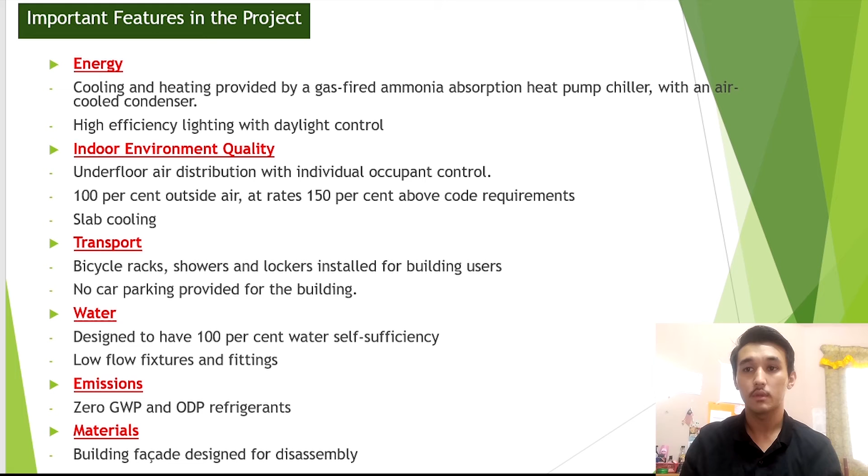Now explaining about the ventilation of this building: it has windows that are rotatable 180 degrees, which allows more ventilation to be transmitted through the building.

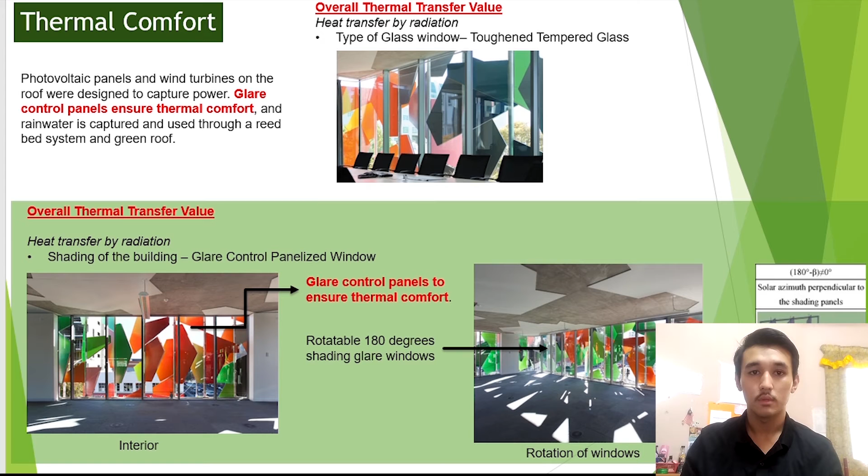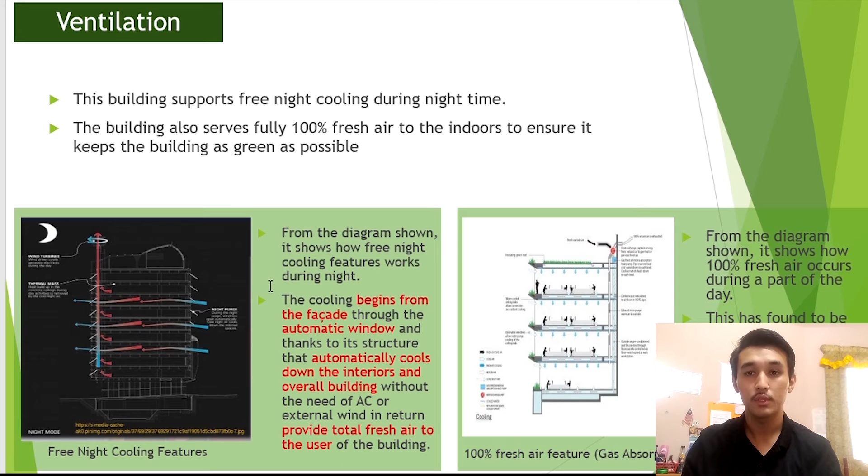This ventilation also serves 100% fresh air to the indoors to keep the building as green as possible. This building relies more on natural ventilation, which minimizes the usage of AC and fans.

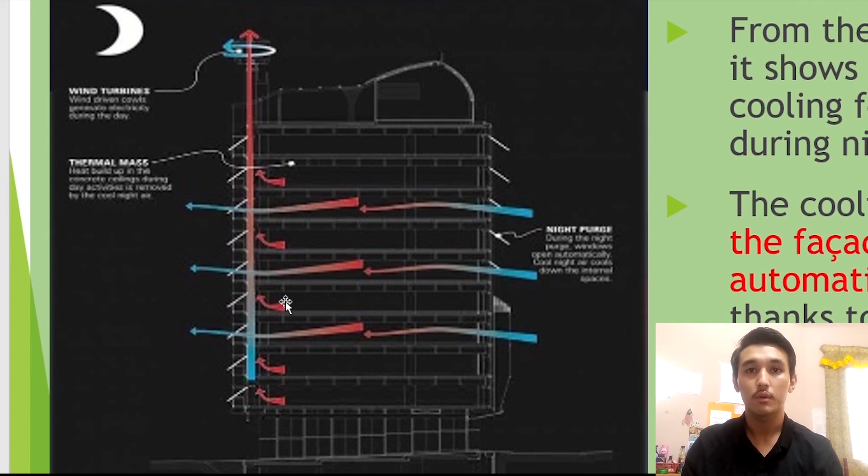As shown in the diagram during the night, this illustrates how the free night cooling feature works, along with the daylight glare control feature built into the building. Thanks to the effectiveness of the built-in glare control, it fully provides sunlight shades to the interior and reduces overall heat.

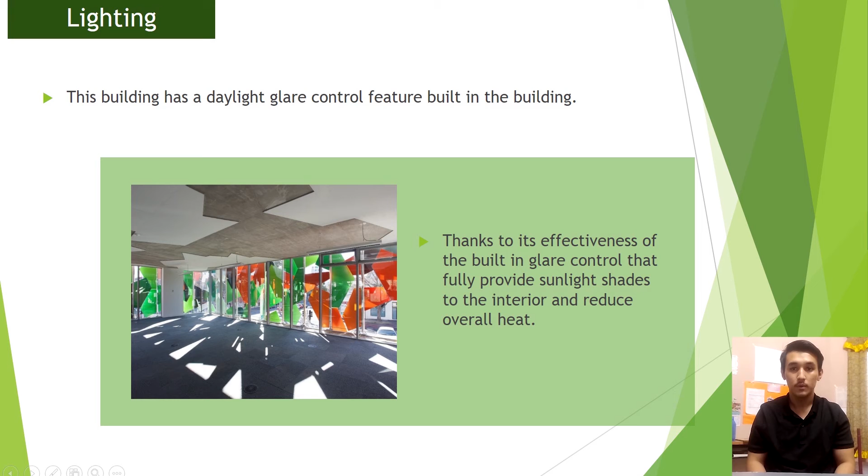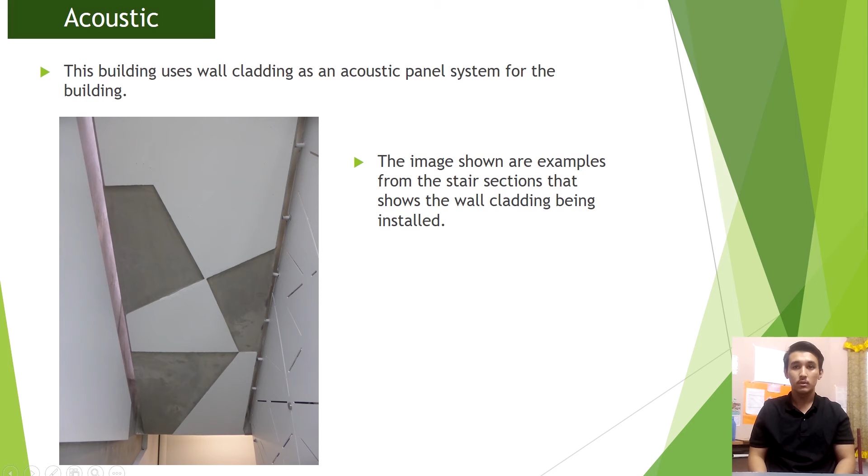For acoustics, this building uses wall cladding as an acoustic panel system. The image shown is an example from the stair section showing the wall cladding being installed.

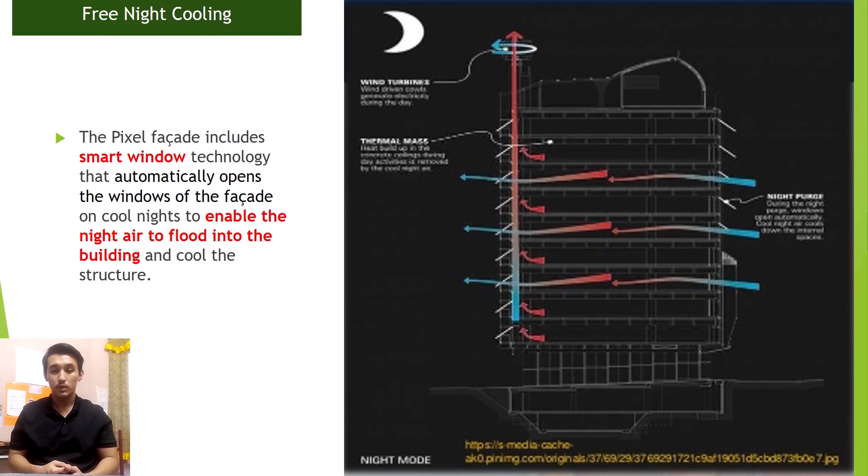Now about the free night cooling: the Pixel facade includes smart window technology that automatically opens the windows on cool nights to enable night air to flood into the building and cool the structure, as mentioned in previous slides.

This building also has a 100% fresh air feature. All of the air being distributed and used in the Pixel building is 100% fresh air.

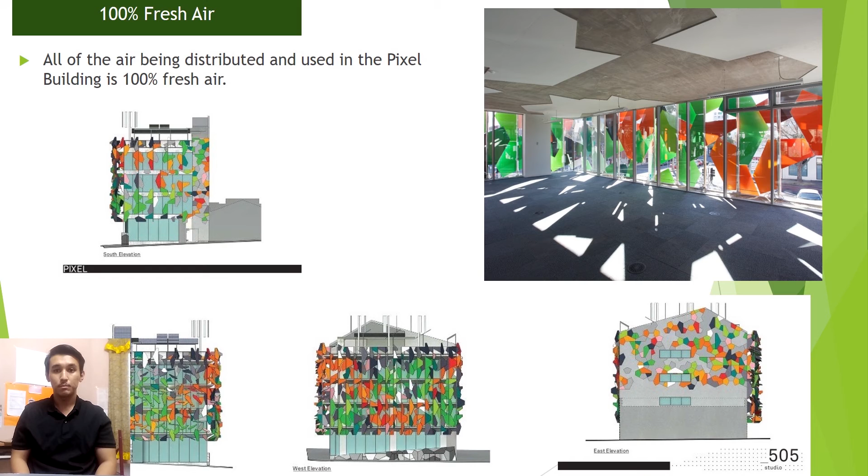Now to the gas-fired absorption chiller. This is the first of its kind in a commercial building in Australia, and as a consequence of this technology, the carbon emissions from the energy are dramatically lowered.

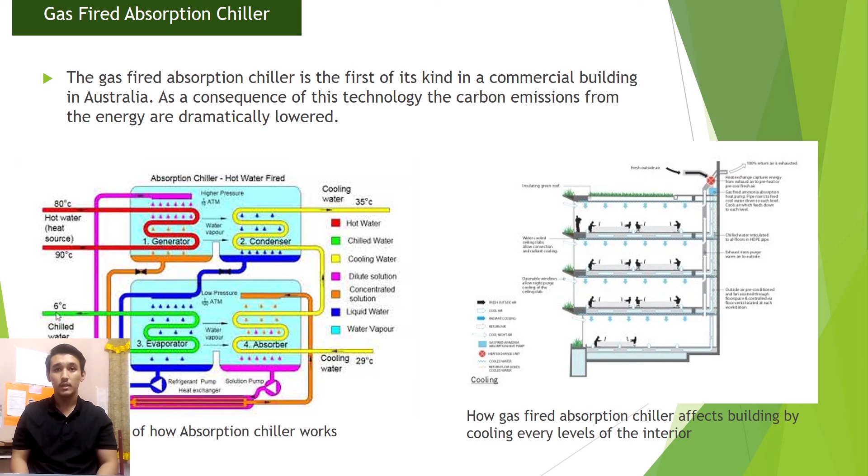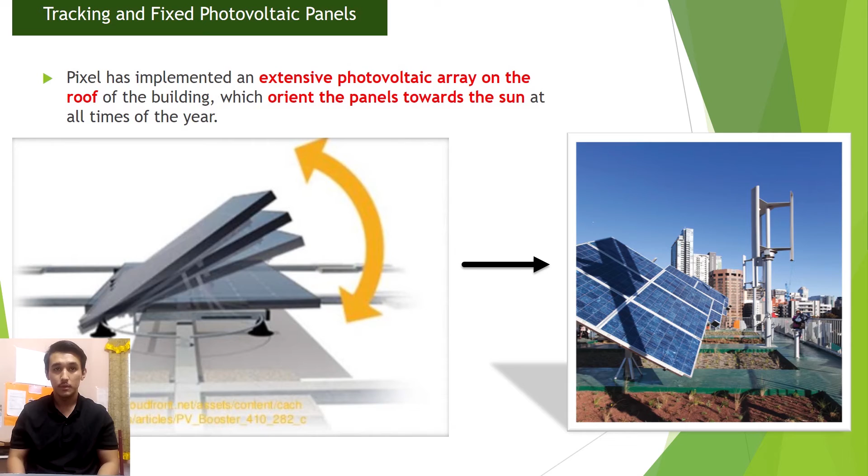The Pixel has implemented an extensive photovoltaic array on the roof, with tracking and fixed photovoltaic panels that orient towards the sun at all times of the year. The solar panels and vertical axis wind turbines on the roof generate energy to offset the building's electricity use, as shown on the roof plan with the wind turbines and photovoltaic solar panels.

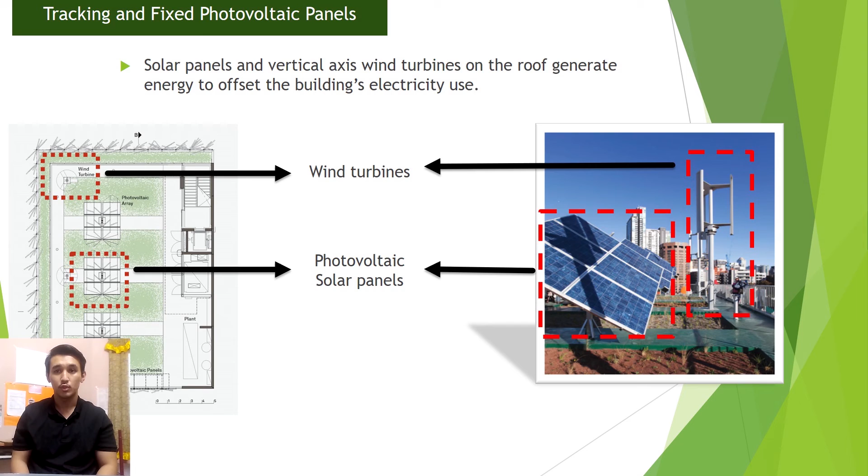Daylight glare control: Pixel is designed to provide 100% daylight penetration into the office space, while allowing screen-based technologies to be deployed without the need for blinds. This is interesting because the building uses minimal to no blinds; the glare control reduces heat and provides necessary shade for sunlight control.

DGP analysis was performed in spaces with dynamic roller shades, full-scale measurements and integrated daylighting glare modeling. Experimental correlations between DGP and indoor illuminances are presented.

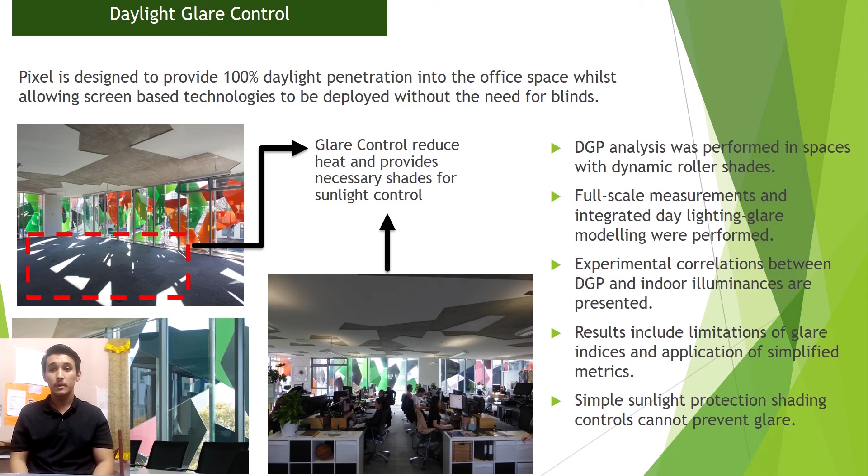Results include limitations of glare indexes and application of simplified metrics. Simple sunlight protection shading cannot prevent glare.

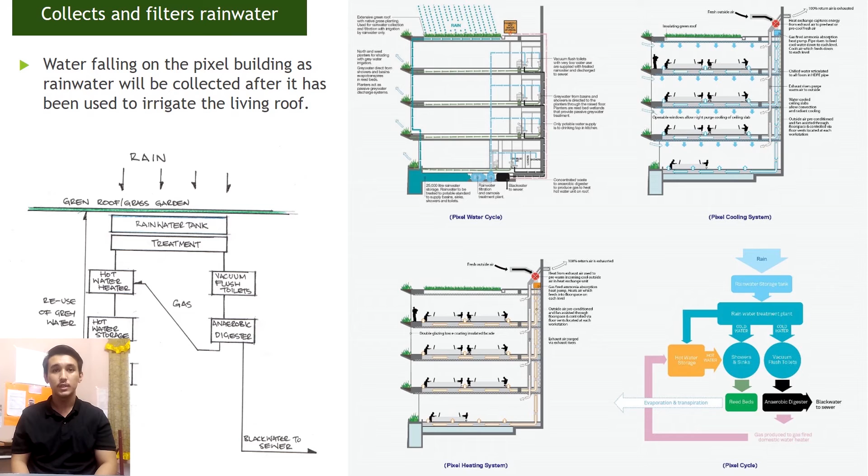This building also features collecting and filtering rainwater. Water falling on the pixel building as rainwater will be collected after it has been used to irrigate the living roof. This feature is very much related to the environmental science project. Also, the office building includes a native planted green roof that harvests and collects rainwater.

From the image shown, the rainwater falling on the living roof has been used to irrigate the beds. It will be captured and stored in the tanks within the building. Once there, it will be treated by reverse osmosis to potable water standard and then distributed to all fixtures and fittings within the building.

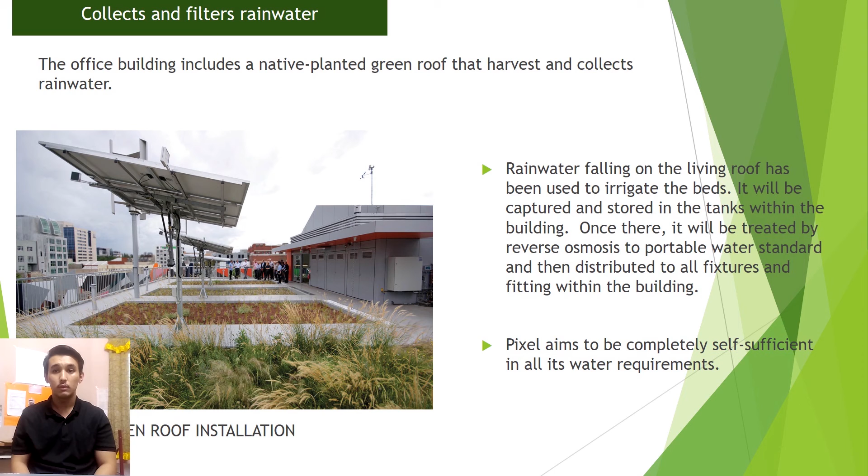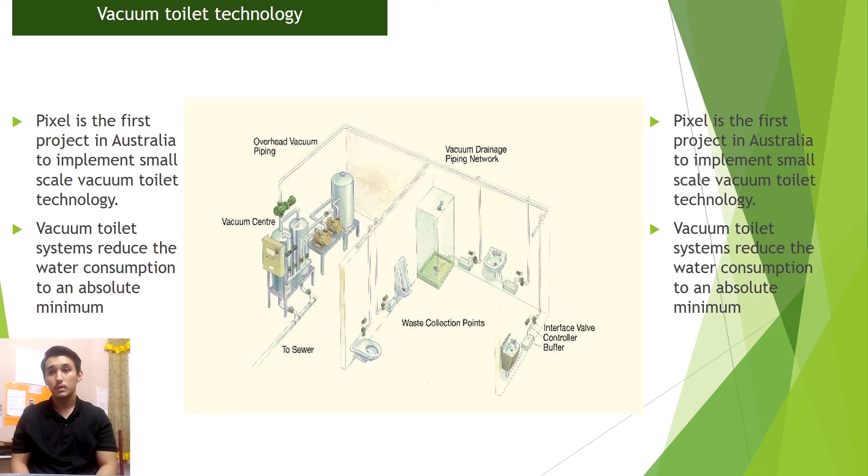Pixel aims to be completely self-sufficient in all its water requirements. This also has vacuum toilet technology. Pixel is the first project in Australia to implement small-scale vacuum toilet technology. Vacuum toilet systems reduce water consumption to an absolute minimum.

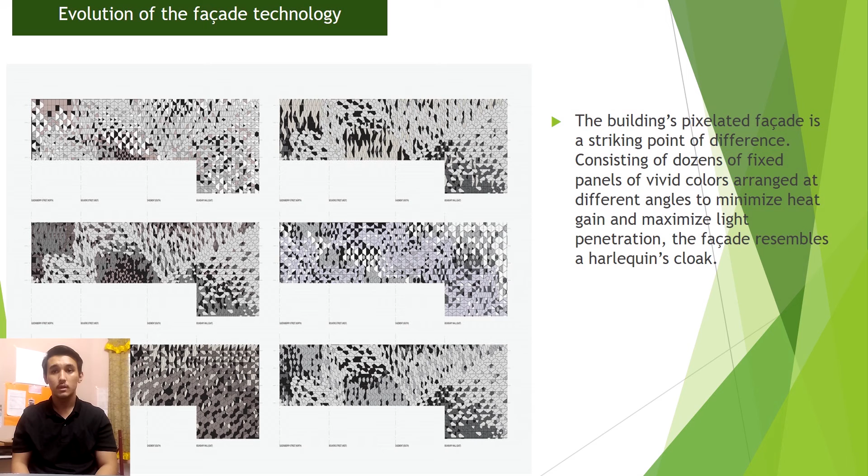Now, to the suggestion. Based on my suggestion and an overlook to this building, they of course have their own advantages and disadvantages to the building itself as opposed to how this building is made and being chosen as a green building. So both of these disadvantages are based on my personal opinion and based on my personal study on the subject.

So to the advantages, the rarely installed night cooling feature really brings an upgrade to the building's identity to a whole new level. The wall cladding of this building offers great ways of reducing total unwanted external noise. The photovoltaic roof installed is a great and smart way of reducing total electricity the building uses.

So the disadvantages. Sadly, the main drawback and disadvantage of night cooling is this feature heavily relies on climate. It occurs only when the climate allows it. The wall cladding installed is very limited and it's only installed on the stair section instead of the main rooms like the office. The photovoltaic installed roofs tend to be expensive in my opinion and don't work for every roof.

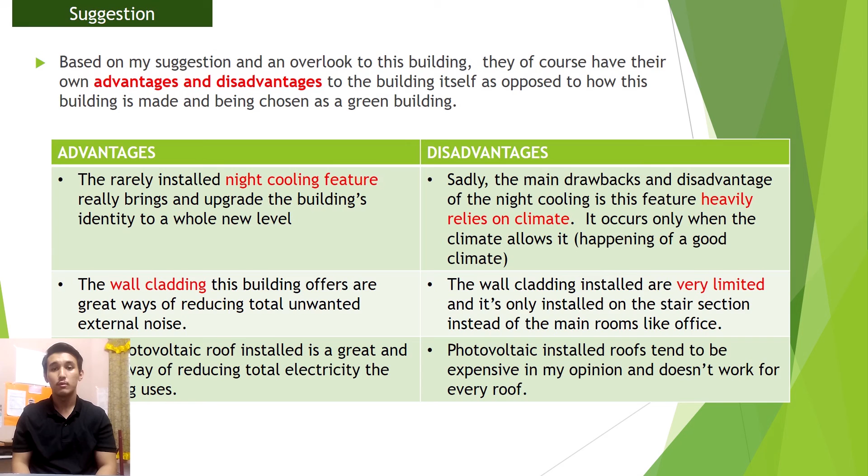To the conclusion, the ecological sustainability design initiatives taken for the pixel building. Carbon efficient: pixel was designed to be carbon neutral. Water balance: given that Melbourne returns to the 10-year rainfall average of 1999 to 2009, pixel could be disconnected from the main supply and be self-sufficient for water supply.

Now the second point, Pixelcrete environmental concrete. Grocon has developed a new structural concrete design which halves the embodied carbon within the concrete mix. This product has a very significant potential worldwide impact.

Free night cooling: the pixel facade includes smart technology that automatically opens the windows of the facade on cool nights to enable the night air to flood into the building and cool the structure. 100% fresh air: all of the air being distributed and used in the pixel building is 100% fresh air.

Gas-fired absorption chiller: the gas-fired absorption chiller is the first of its kind in a commercial building in Australia. As a consequence of this technology, the carbon emissions from the energy are dramatically lower.